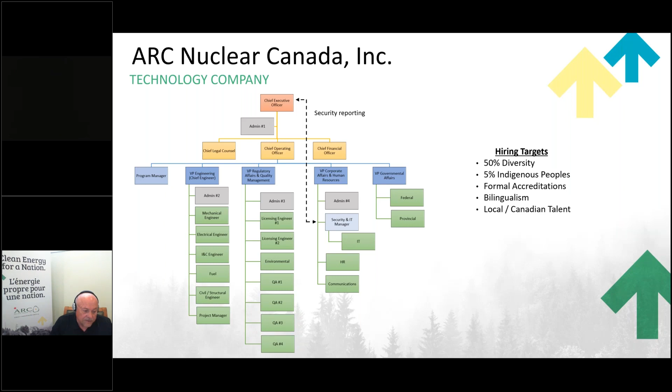With Phase 2 comes expansion for us. Essentially, our company will grow by 32 individuals. We've been doing a lot of organizational development as we move forward. We have hiring targets, as you can see, and we're really trying to change a bit of the paradigm in the nuclear industry with a lot of diversity, with Indigenous peoples working with us, obviously bilingualism. In fact, the company is trying to reflect the province and the provincial culture as it stands today. So these will be exciting times for us as we continue to grow here by, as I mentioned, about 32 people.

As you can see here, with the growth for the actual project itself, we'll have a lot on our plate. Somewhere around 75 people will be working on Phase 2. You can see that ARC Canada at the bottom, the blue box, will grow by more than 30, which means our office will have to expand.

Our offices right now are in the Bell Aliant Tower next to Brunswick Square. But also you see additional offices coming in for worldwide companies like AECOM, which will be moving in, and our negotiations are pretty well complete with them. Worley will be hiring additional people to support us, and also GE, we're in negotiations with them to talk about how they would essentially move one of their offices into the province of New Brunswick, and most likely Saint John.

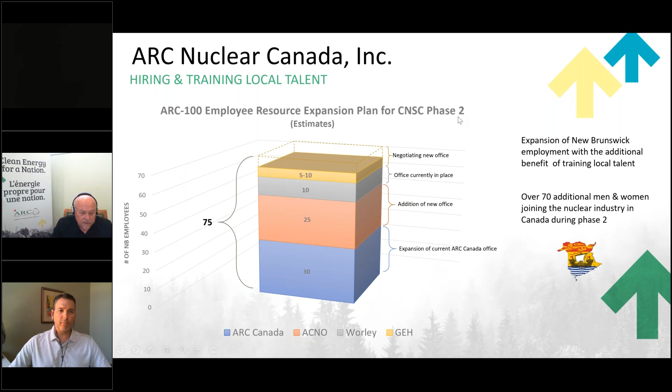Just a quick talk about inherent safety and waste reduction from our technology. Inherent safety for us is really that it naturally controls its power output without human intervention. And that, as Paul mentioned, is really about not having engineered systems doing this. It's just nature itself automatically responding to temperature changes and changing the reactor power to a safer level.

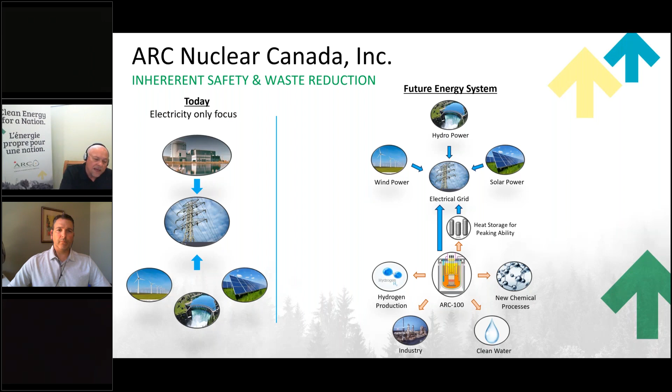And what's occurring in the energy systems is really changing. The future energy system will most likely be much different than today. With, for example, technology like ours, the ARC 100, providing not only electrical energy but also heat storage capability for peaking, and providing off-the-shelf technology that basically has just large tanks that can store heat. But also the technology that we produce combines very well with hydrogen, chemical production, industry, and clean water desalination. The size of the reactor is perfect for that, and that's what makes it so appealing from an economic growth perspective, particularly with the factory built process.

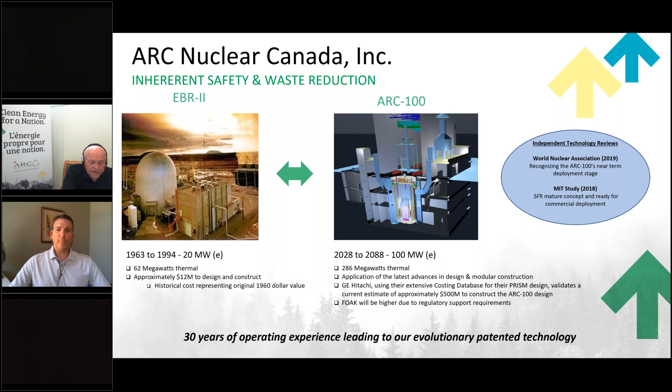As I mentioned, our technology has been proven. It's a little reactor that ran for over 30 years, so we have all the data, all the information from the first shovel in the ground to the decommissioning. So we know exactly what we need to do, how we need to do it, and how much it will cost. A number of studies have supported or validated our assumptions; the World Nuclear Association and MIT are all saying that our type of technology is ready for commercial deployment, which makes it such a lower risk opportunity for the province of New Brunswick.

But not only that, we have to deal with waste. The new technologies today have to address some of the concerns the public has. And here is just an example. One of the things is reducing waste. So you can see equivalent megawatts of power production. You can see here that while a typical CANDU might produce over 20,000 fuel bundles, we would produce the equivalent of about 184. And where a typical CANDU reactor today, like Point Lepreau, fuels 3, 4, 5 times a week, our reactor is fueled once every 20 years.

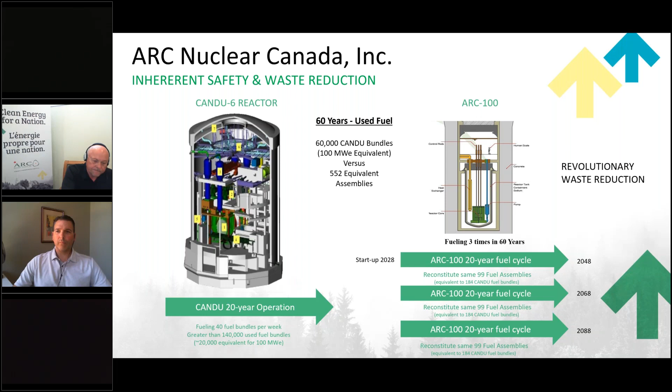And then we reconstitute the fuel, which means we recharge it, and we run again another 20 years, recharge a second time, and we run a third time for 20 years. So over 60 years, there would only be 3 fueling cycles. It also provides options for New Brunswick, which is important. New Brunswick has made investments into technology like ours, and so you want to reduce the risk as much as possible.

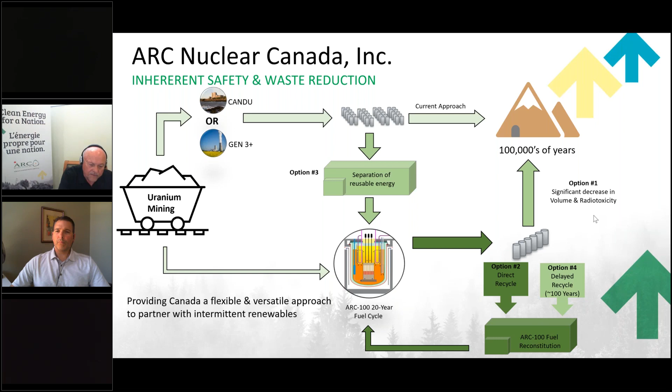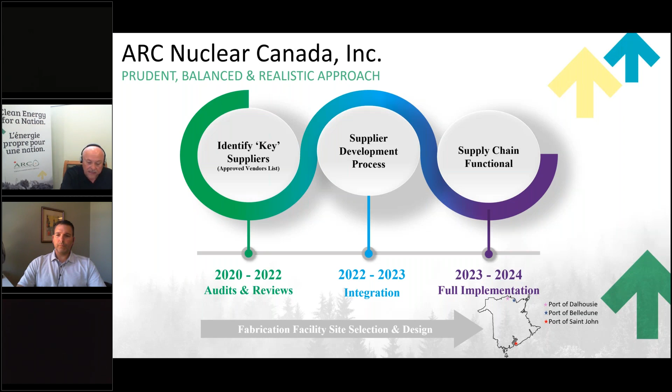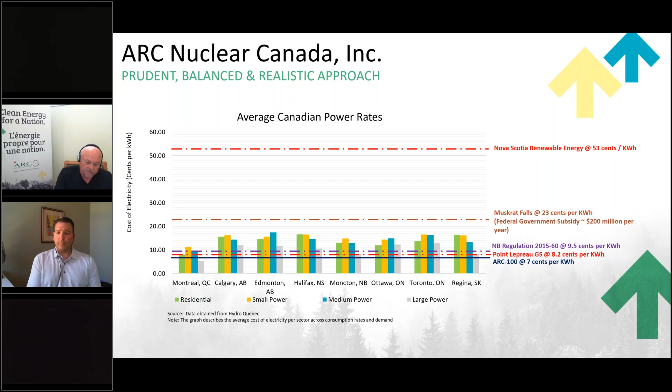So if there's one point I want to get across here today, it's the fact that it's not about building a power station. It's not like Point Lepreau, where construction in its heyday had all kinds of people working, and then after that, everybody left. And then we had the refurb, everybody was working, and then everybody left. And one of the things that was left behind was a big bill. I guess this is the best way I could explain it. So we have to understand this is not what we're looking at here.

We're looking at building a manufacturing chain here in New Brunswick. We're looking at construction jobs. We're looking at O&M, which means the people that run the plant, but we're also looking at that supply chain and manufacturing to provide indirect and direct jobs for the economy. What that means is, yes, we're going to get low-cost energy, which is clean energy for hospitals and manufacturers and electrification of the transport system.

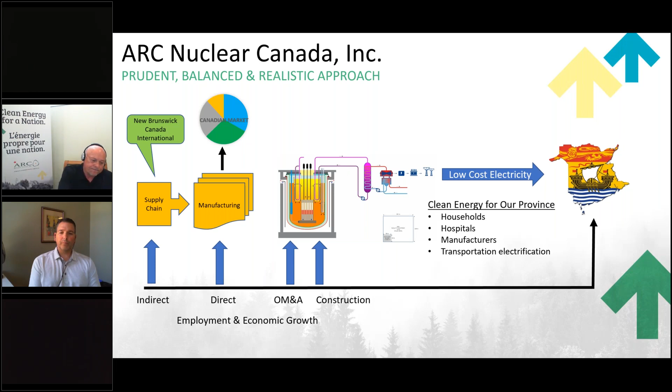But you're also going to get the economic impact of the tax dollars from households, from people working, from private investments, from having companies like AECOM and GE move into the area. This can have a significant impact and assist New Brunswick with some of its goals of addressing some of its economic woes, I guess I would say. With that, I'll turn it over to Moltex and Quinn.

Thank you very much, Norm. So I guess Randy will help me with the slides. Thank you all very much for giving me this opportunity to present. My name is Quinn. I'm from Moltex Energy Canada.

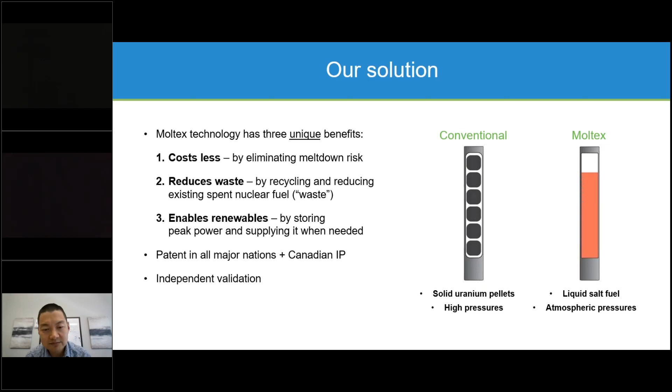Regarding how we work with renewable energy: our reactor has the intrinsic feature of energy storage, storing heat in the molten salt. Our technology works like a big battery — when you have an excess amount of renewable energy, we can absorb that. If the customer needs more energy, we have the peaking capability to satisfy that need. By having Moltex technology on the grid, we can allow more renewable energy to be connected. That's one of our big advantages.

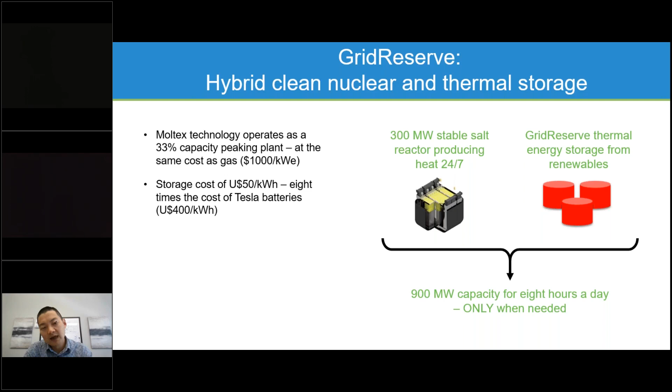Hello Quinn, we're having trouble hearing you. Hello, can you guys hear me? Yes, we can now, Quinn. That's great, please continue — I think I lost the connection the past several seconds.

Now we're talking about the fuel cycle. In the past, reactors burned fresh uranium and buried it — that's called the open fuel cycle. What we introduce is a closed nuclear fuel cycle, using Moltex technology to burn existing nuclear waste. By doing so, we're not generating extra nuclear waste, but rather reducing the existing nuclear waste, while meanwhile generating electricity.

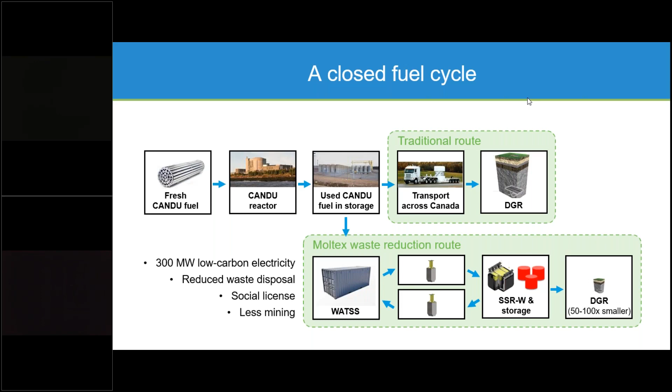When we think about our technology, the cost of electricity is a very important factor, because people have to be able to afford the electricity we generate. The cheaper we can go, the more people can enjoy clean energy, making a significant and meaningful positive impact on the environment. If you look at nuclear over the years, it started cheap in the beginning, and the cost has gone higher and higher because people kept adding extra safety features.

For Moltex, we start from the very fundamentals of this technology, and we change the fuel to molten salt, which gives us extra defense against nuclear accidents and nuclear release. By doing so, we're able to reduce the cost while maintaining very high safety standards. Our cost will be significantly lower than our competitors using water-cooled technology. With these costs, we expect to provide clean energy to a lot of people and countries around the world.

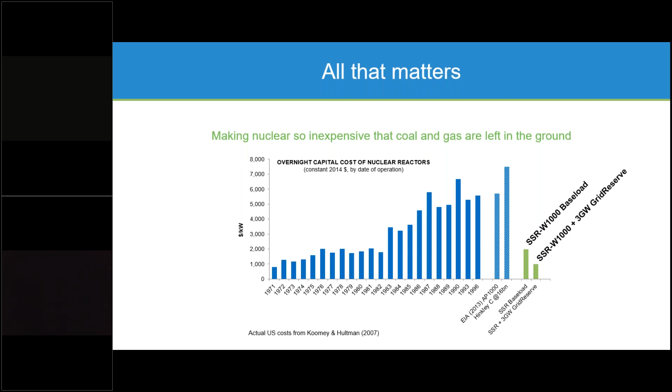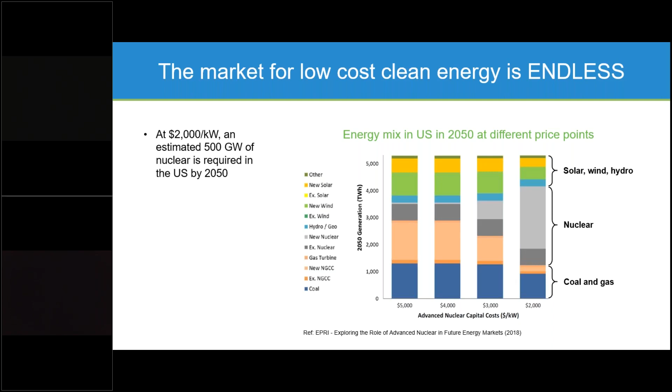Our current activities: we've partnered with New Brunswick Power, as I mentioned earlier. At this time, we're finalizing our CNSC VDR review. We've established a partnership with University of New Brunswick, a very important strategic partner for us, and we've been working with Professor Willie Cook's team at UNB to develop technology that can maximize our capability to reduce waste.

We're also looking to expand our collaboration with UNB into information security and advanced manufacturing. We hope to work with UNB to establish an R&D center in New Brunswick, so this technology can take root and be developed there. We have an office in Saint John with more than 15 technical staff currently, and we're actively hiring more people. We're getting funding from the US, UK, and Canada, and spending our money here in New Brunswick.

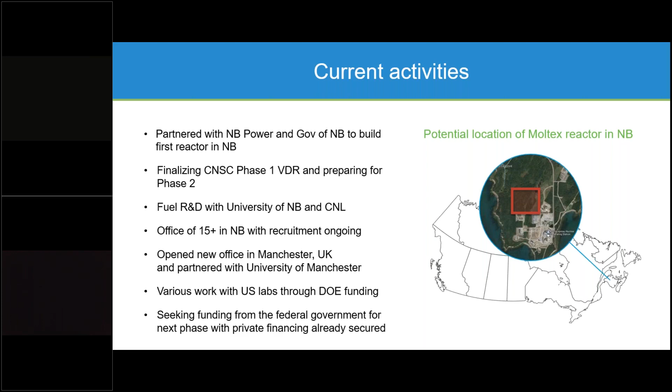In the past year, we've done a supply chain study to understand the capability in New Brunswick. Our goal is always to base in New Brunswick — it's a New Brunswick-centric strategy, because we're very thankful New Brunswick has this vision and determination to lead advanced nuclear technology development in Canada. Every time we look at supply chain, including component making and engineering services, we look at New Brunswick first, then Canada and the rest of the world. In the future, as we develop this technology, we'll have the same strategy for manufacturing supply chain.

So the study last year showed that actually 46% of our components can be made in New Brunswick. And that's a big part of the supply chain. Considering the size of the province, if we can establish a manufacturing base here just for that 46%, it's going to be a huge market and huge opportunity. And we're doing everything we can to make that a reality.

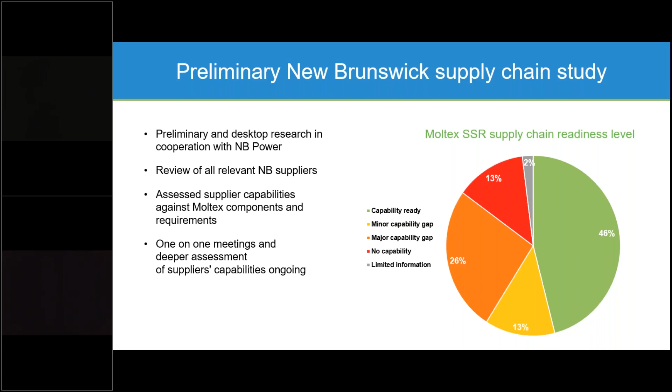This is actually talking about component manufacturing, but we have already started working in New Brunswick. In terms of engineering services, we have already been hiring New Brunswick companies and independent consultants to help us with the design. I can see some very familiar names from the attendees of this webinar.

And we intend to put the NB supply chain first. That is always our commitment. Can we go to the next one?